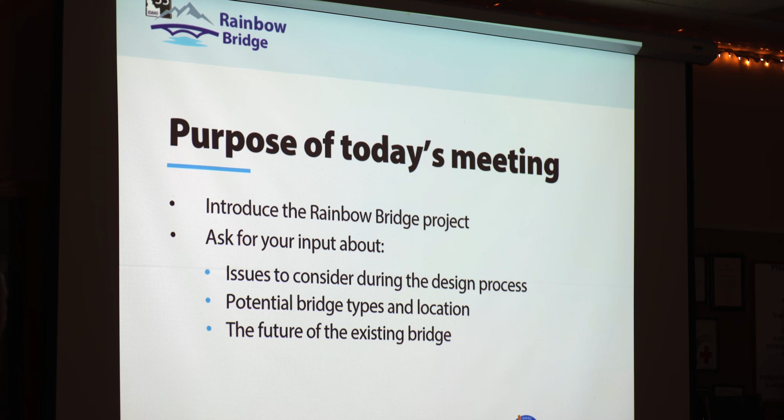Today's meeting, again, is to introduce the project. We're also going to ask for your input. We want to know what issues we should consider as we go through the development and design process on this bridge. What things are important to you? How should we look at this? Are there things that we don't know about in the area or that we need to consider as we design the new bridge? We'll talk about some potential bridge types and the locations of where that bridge might be. And then at the end here today, we'll get into some of what we're thinking with regard to the future of the existing bridge.

Let's talk about the history of this bridge. I mentioned that it's over 90 years old. It's going to be 100 soon. This is a Depression era bridge. So this was built in 1933. The funding for it actually came from the New Deal. This was a major work at the time, and this completed the link for this section of the canyon, which was previously pretty difficult to navigate.

So this was an important link to make it possible to travel between the Boise area and the McCall or Cascade areas. The quotes at the time would kind of astound us in today's terms, right? Down to a 7-hour trip, very reasonable travel time back in the day, but with no particular pressure on the driver.

So I don't know if you've been followed on 55 lately. I feel a lot of pressure if I'm driving anything other than the speed limit.

So why build a new bridge? First of all, old bridges at some point become challenging to maintain, and this bridge is no exception. The aging concrete will start to show its age. You'll get erosion and delamination of the concrete. The rebar that's inside the bridge, in this case some old square bar, will start to get significant corrosion on that bridge, which then contributes to the concrete delamination.

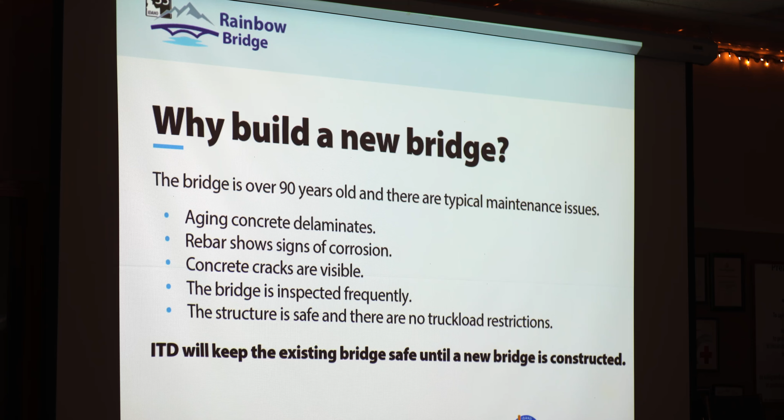So I wanted to emphasize the fact that this bridge is safe today. It's inspected regularly. There are no restrictions on the bridge. So while the bridge itself is not new or modern, the bridge is certainly suitable for traffic today. But we know that won't be the case forever. So we're going to work diligently to keep that bridge safe for as long as it needs to remain in service for traffic. But we know the day is going to come soon when we need a new bridge to carry that traffic.

The other reason for a new bridge really is to get this section of highway and the bridge specifically in line with modern highway standards. The existing bridge is narrow. The existing bridge doesn't have any shoulders. The curves on the end are restrictive. If you've been by this very often, you notice the rails have been hit before with wide loads or errant vehicles. And there are vehicles that are not permitted on the route in part because of this restriction at this exact bridge.

So this bridge is not up to what we would use for the standards of how we would design a bridge today. It's also not feasible to widen or significantly improve those features of the existing bridge. Some bridges, you can add another line of beams, another line of girders, or put a wider deck on. This bridge, that really isn't feasible to do that with. So there's really nothing that can be done to the existing bridge that would make it meet the standards, the widths, and the alignment that's needed today.

We've put some amount of effort into this bridge already. Back in 2021, we initiated what we call a feasibility study. This feasibility study was how ITD went out and solicited some specific information about where could we put a new bridge, what could we do with the existing bridge, could it be widened? We looked at that at the time. And what that study concluded is what we're telling you today about the need to build a new bridge.

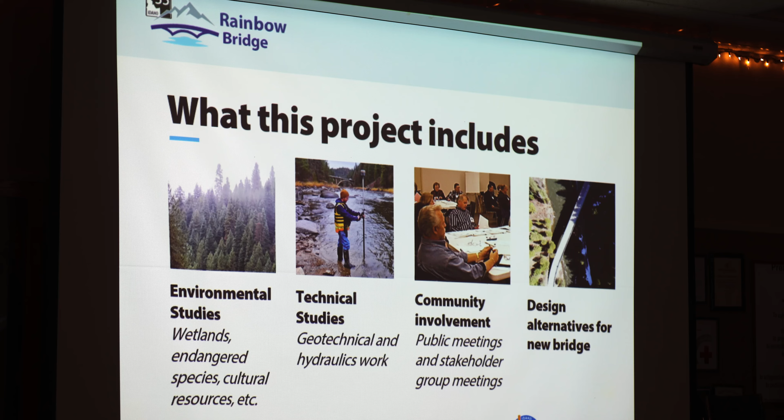Foremost on all these projects, we have to consider the environment. There's a lot of environmental studies that we'll do, and we'll spend quite a bit of time documenting wetlands and endangered species. And this bridge will have cultural resource work owing to the fact that the bridge and the highway itself are historic. There will be a number of technical studies. You see us there surveying the river. We have to make sure that we can accommodate river flows and runoff and drainage, as well as obviously the bridge design, the roadway design, the slopes of the mountain above and below this.

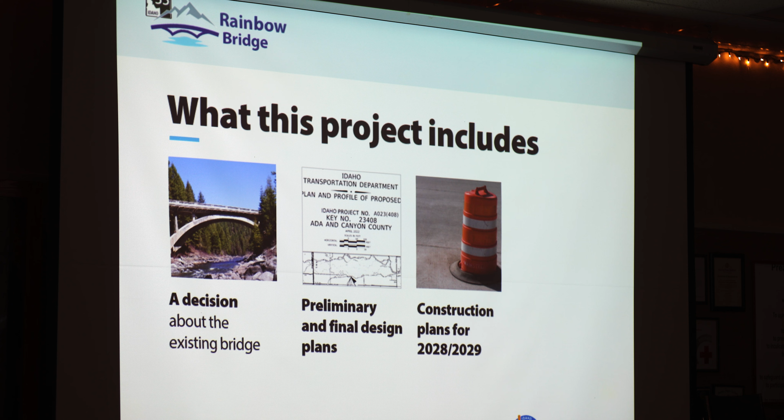We have meetings like these. We get your input, we ask for the community's involvement, and then we'll design the alternatives for a new bridge. We will ultimately also have to make a decision about the old bridge in the course of this project, and we'll generate the entire plan and specification documents that we'll use to ultimately hire a contractor to build the new bridge and put construction plans together that are currently targeted for approximately 2028 or 2029.

That sounds like quite a ways in the future. In bridge years, it goes pretty quick. But we're going to take every advantage we can of trying to accelerate this project to meet or beat that if we can. So that's where it sits in our program right now. We'll see as that grows closer what our actual construction year will end up being.

We know this is a challenging location. If you've traveled the corridor lately, you might see we occasionally have flaggers out there. We're doing some drilling and investigation on this site already, and even that is challenging with steep slopes and narrow access paths.

We have not decided yet what we're going to do with the existing bridge, and we've not decided yet what the new bridge will look like. So this process is going to develop that, and we'll bring you along as we develop those concepts. But we wanted to start early and get your input into those decisions. And so that's really what the group here today is about.

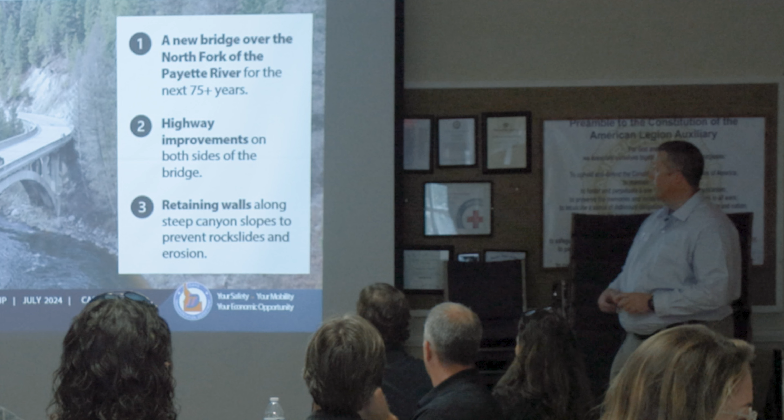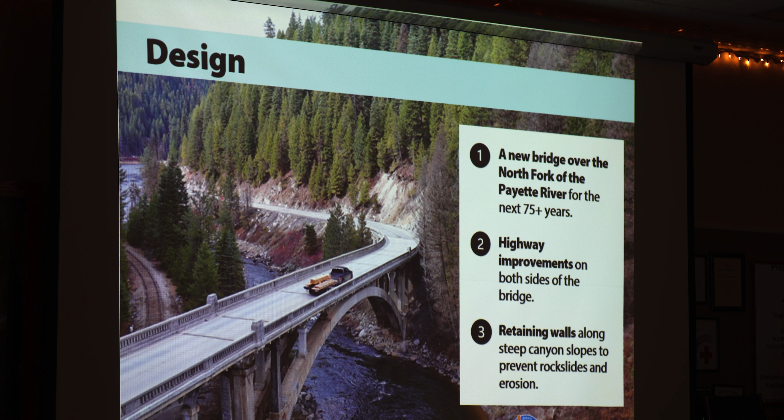We will, through the design, come up with a new bridge that'll serve for at least the next 75 years. Bridges can go longer. The existing bridge went longer, but we'll be designing something for a minimum of the next 75 years. There will be some highway improvements in the area immediately adjacent to the bridge as we affect the curves and the slopes that come in and out of the bridge.

This project isn't set to do the whole canyon, though there will be future work on the canyon itself, but this is going to address enough of the approaches, enough of the roadway on either side to get on and off of the bridge safely. Part of that is going to take some retaining walls. You can see the very steep slope there where the trees are missing. That's just downstream of the bridge.

The new bridge proposal will have to deal with places like that, and so there will be almost certainly some retaining walls and some rock cuts and other things to deal with as we get onto and off of the new bridge. So part of the work of this bridge project will be some of the slope work and retaining walls that get you to the bridge as well.

We will, in the design phase, consider what type of bridges work at this location. There's a lot of types of bridges out there. I'm going to let Dan go into that because Dan does that for a living. I work on highways more broadly, but we'll ask questions of ourselves like whether steel or concrete for the bridge is more appropriate at this location. Which is more constructible, which is more durable, which is more cost effective.

We will do a lot of studying of the rock and the soils, and we'll look at how the rock up here will weather, how these slopes will hold up over time, how we retain the soils with walls or things. We have a railroad crossing at this location as well. Most people don't think much about it, but the railroad that runs along the river here also crosses under this bridge where it leaves the highway alignment. Railroads, even though this one isn't in operation today, have very specific operational widths, heights, and criteria for how we treat the railroad tracks.

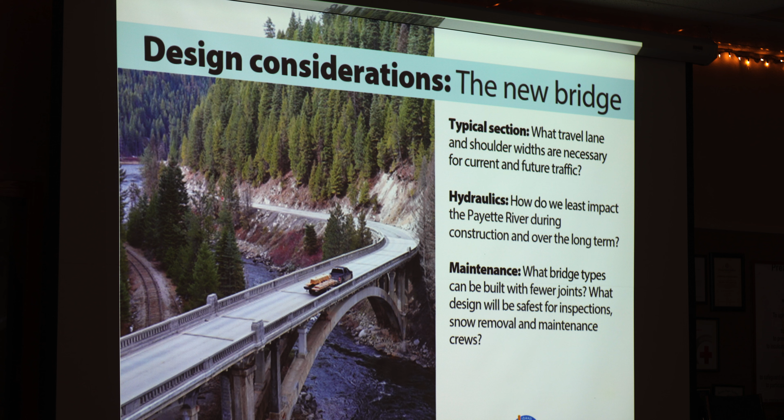We will look at maintainability. So can we build a bridge that is low maintenance and high performance over the long term? And we make sure that there's safe access for the annual or biannual inspections that we have to do. We look all over a bridge at least every 2 years, under it, over it, around it, and we need to be able to do that safely. And obviously in this location, we have to be able to plow the snow.

I mentioned constructability earlier. It is going to be difficult to get some of the large cranes and equipment to this site where they need to be positioned in order to build this new bridge. That kind of has to be taken into account in the design. We need to design the size of the components, the weight of elements and things such that they can be delivered up the highway and then put into place over the river at this site. So that's not something that we take lightly. That'll be part of the design, considering how the bridge would actually be built.

And then of course, we are very interested in what the community input is on this bridge and what features you value and how we can reflect those in the design. The curvature, the narrow approaches to this bridge right now is something that we call alignment. Alignment affects more than just how fast you can go. It also affects how far you can see and ultimately safety.

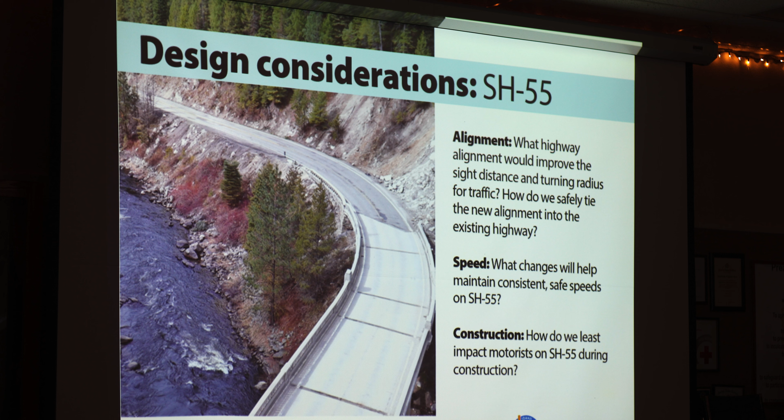So we're very concerned about the alignment of the bridge we build. That'll be a big part of the design. The speed sort of follows from that. We'd rather not have speed restrictions on the corridor. So we'll look closely at what the speed of this section is designed for as you cross a new bridge. You probably slow down a little as you pass the bridge today. Hopefully you won't have to do that at least as much in the future.

And then we also, as well as the constructability, will look at the construction impacts. So how does our construction affect people using the highway? Will there be flaggers or delays? Will we need any closures? How will that affect people that are traveling the road during our actual construction project?

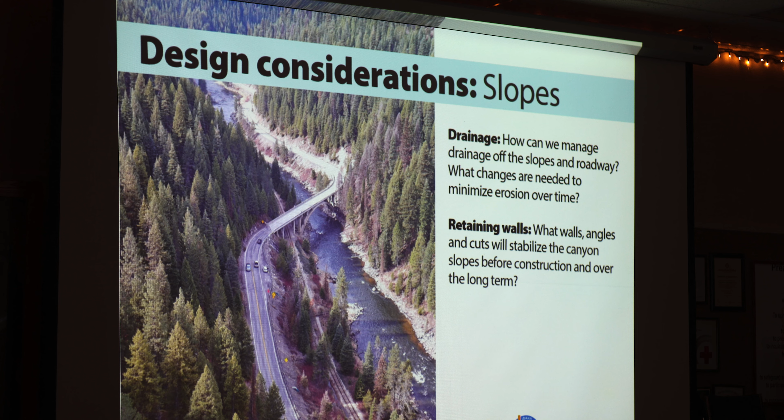We will look at how water from the bridge and from the roadway and from the slopes gets to where it needs to go over time. Make sure that we don't create any erosion or put any sediment in the river. We'll look at how we design those retaining walls, how we finish those walls, so what the face of those looks like, or how they're specifically built, both in terms of their function and their form, so what they look like and how they work.

So I realize that's a lot. I've gone through it pretty fast. But our first question for you, is there anything we haven't thought of? Are there other issues that you'd like us to consider as we embark on this project?

As Jason mentioned, I'm from Modjeski and Masters. We are a bridge-focused engineering firm. I'm the assistant director for our national bridge group, and we focus on unique, complex, long-span bridges. So my career really has been on arch-type bridges, truss bridges, suspension bridges, cable stay bridges, things like that. So this is the kind of stuff we do regularly, and it's actually kind of fun.

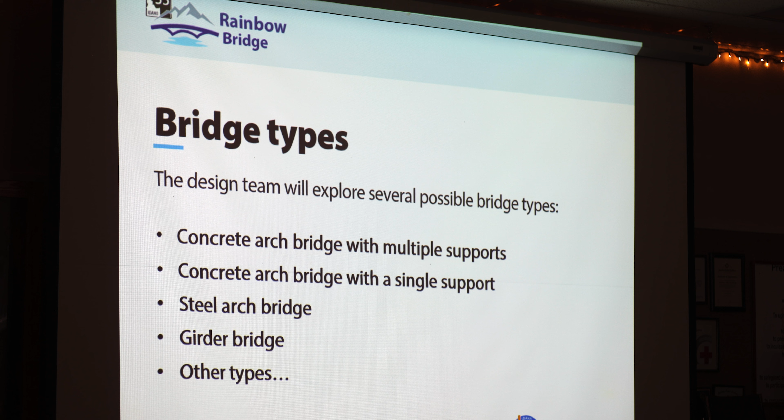As Jason mentioned, not every bridge type makes sense at every location. As I mentioned, I've done a lot of work with truss bridges, suspension bridges, cable stay bridges. Those are a bit too big for this location and unnecessary. They don't quite make sense. Could some of them be done? Maybe, but it doesn't quite make sense. There's a few that do make sense. So we're currently investigating 2 concrete arch options, a steel arch option, as well as a steel girder option. And girder is just an engineering term for a beam.

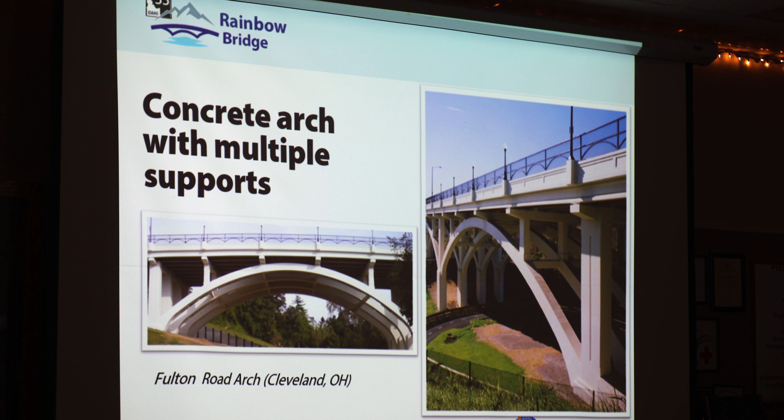The one concrete arch option we're looking at is one that has multiple columns on the arch. It's a very traditional design, very classic, very similar to the existing Rainbow Bridge. Arches do like to be loaded along their entire length. That makes them more efficient. Having multiple columns is an efficient design. This one actually is about the same scale as Rainbow, around 200 feet end to end of the arch span itself.

The existing Rainbow Bridge in 1933 was built cast in place concrete. They actually built the formwork for the bridge in the shape of the bridge and poured the concrete in there at the site. We don't really do that anymore. Nowadays, most things are precast. For example, in the case of this bridge, each half of the arch segment was cast off-site somewhere and then shipped to the site, connected in the field with steel that goes through it, kind of squeeze it together, some concrete closure pours that fill in the gaps. So that is a slight difference.

But what that also means is that you're dealing with heavier pieces. Concrete is heavy. Usually, concrete bridges require bigger equipment because they're just big, heavy pieces that need to be lifted, as well as transported to the site.

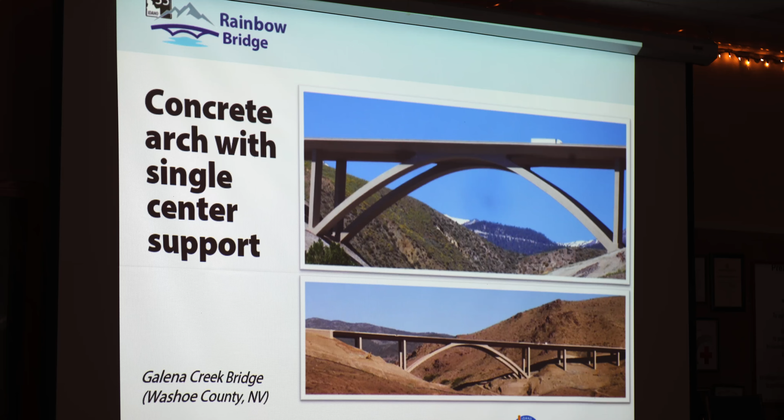Another concrete arch option we're looking at is one that just has essentially a single support in the middle. Here's a couple of examples. This would be different enough from the existing bridge. So it's a little bit more of an open, modern looking feel as opposed to the traditional design. It would be built quite similarly using precast pieces. There's a famous one in Tennessee.

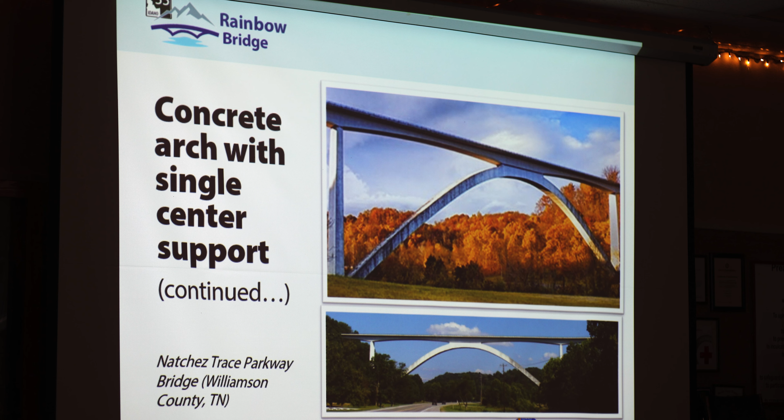These samples are obviously a bit taller and longer than Rainbow, but they have their own aesthetic merits. Even though this is slightly less efficient of a design than being loaded along the entire length of the arch, it's still very reasonable, very feasible.

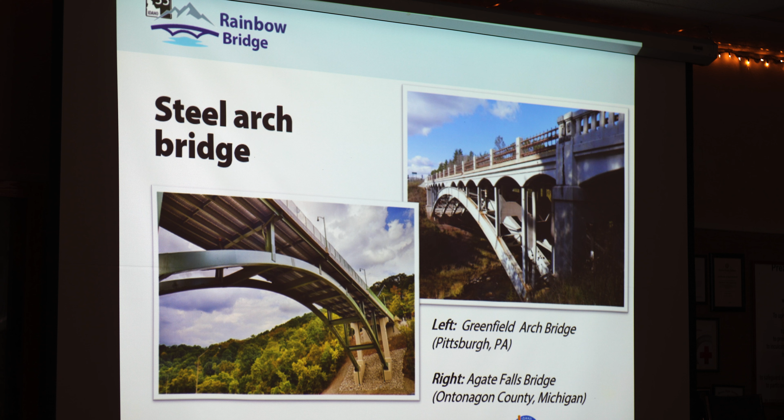We're also looking at steel arch options. Here's a couple of examples. In all of these cases, we would use multiple columns. Some of the benefits of steel is that steel is generally lighter, so you need smaller equipment. It's easier to transport, easier to assemble. Additionally, it's a bit easier to repair. It's a bit easier to bolt things onto steel than it is to repair concrete that's falling apart.

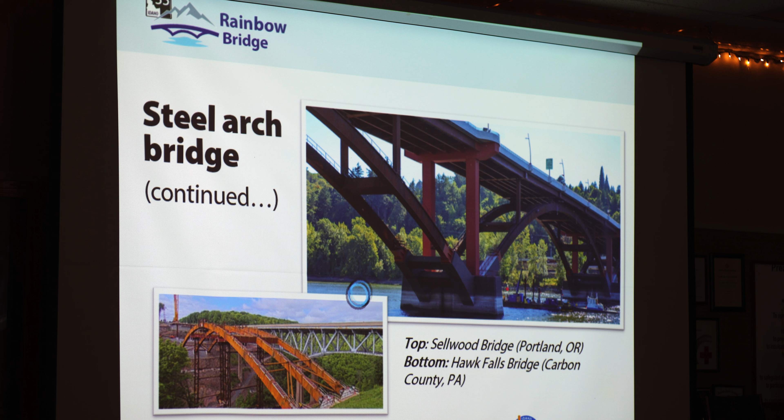That one on the lower left is under construction. That picture is just a couple of weeks old. I was the lead designer on that one. That's an arch bridge in Pennsylvania. So I think we would end up looking quite similar to this one up here, except we would only have one span over the river.

And we're also looking at steel girder bridges. Like I said, girders are beams. This would be more of your standard overpass type bridge that you're familiar with seeing throughout the state. Very simple, very efficient. Some would say not much to look at.

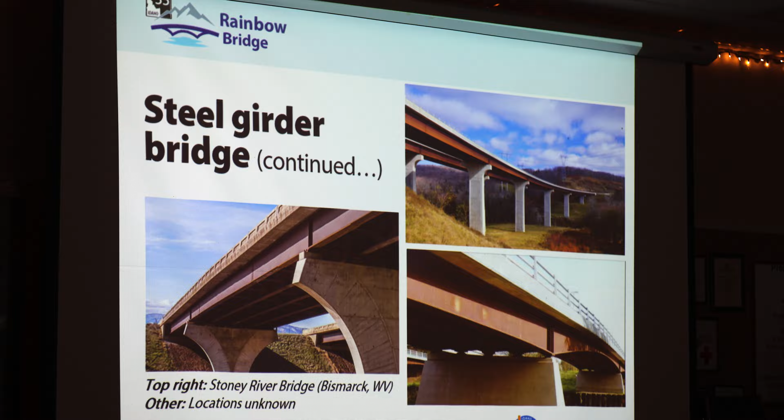You have some opportunities to bring in some aesthetic things, like the piers here have a little bit of a detail there, or this was cut to be a little bit of an arch shape, but it is still a beam, not an arch bridge, even though it looks a little bit like an archy shape. So we are looking at a girder option that would be kind of the simplest baseline you could consider.

We're looking at these different alternatives, and ultimately our goal is to compare them against a bank of criteria: cost, constructability, aesthetics, durability, maintenance, all of those sorts of things. And as part of the process, then we kind of score them and essentially come up with a recommended alternative that gets presented to ITD, and then we go through the process to actually pick one. And that'll be sometime, hopefully later this year, as we start making those recommendations.

Is there anything else that we should be looking at or considering? Any other criteria that we should be comparing the options?

So if you spend any time in engineering school like I did, that part's pretty exciting, right? Figuring out how to design a new bridge, especially what is, by all accounts, a landmark bridge. Believe it or not, I actually participated in contests when I was in college, building scale model bridges and competing them. So it's kind of the fun stuff for engineers to consider.

We'll have a lot more to talk about the new bridge. If you remember, the next meeting is all about features of the new bridge. So a little teaser for that. Please come back. We want your continued input into the design options we come up with. Dan, I think, has a lot of great ideas on how we can go with this, and we're eager to show you what we'll come up with there and get your continued input on that.

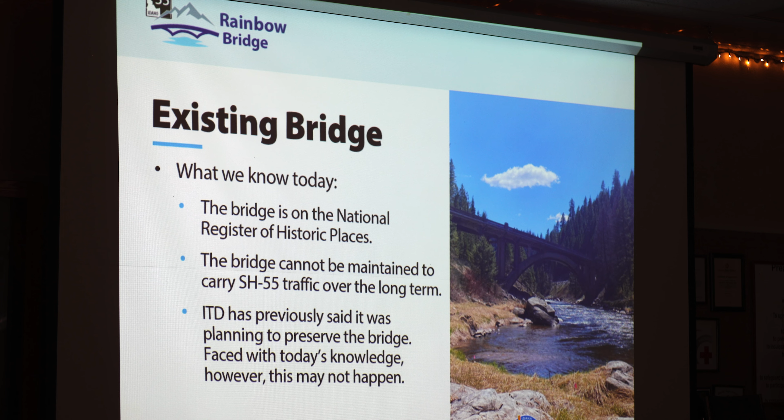So we're going to do a lot more work on that as we move forward to figure out, can we or can't we? What does that maybe look like? We know we have to keep this bridge functional until that new one is done, and we will do so.

There are minor issues on the bridge today that are going to take some short-term fixes. So we are planning on a project next summer to do some repairs on this existing bridge. Those are necessary to keep the existing bridge in the condition that it can be open and unrestricted for traffic.

So I definitely want to emphasize again, this bridge is completely safe today, but we have to design for the next earthquake, the next 1,000 trucks, the next 10 years of keeping this bridge safe while we build a new one. So there'll be that repair project next year to keep it in that case.

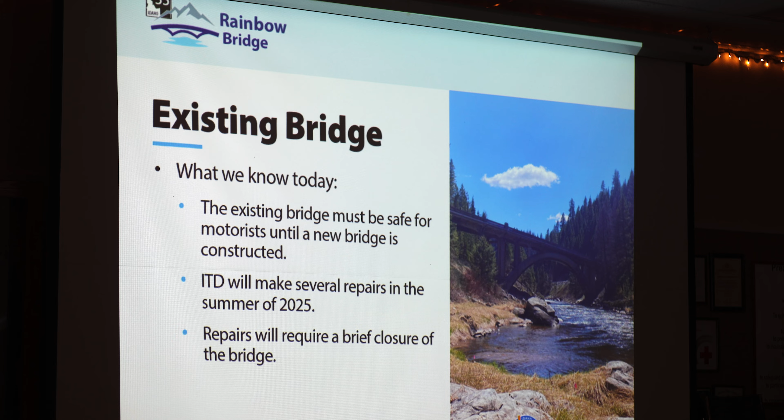There will be some short interruptions and closures while we're doing that, and we'll have more information out on that as we develop those. So there might be some times when there's a flagger and a short delay at a flagger station, or we might have some longer closures, say middle of the day, like we did when we were doing the Smiths Ferry project. So we'll figure out, based on exactly what those repairs are going to take, what that'll look like.

It's hard to get underneath the existing bridge. There's not a lot of access, and so we kind of have to do that off of the bridge which is disruptive. So we'll keep that minimized, but just wanted to give a heads up that we are going to be working on the bridge in the meantime.

We still need to know your thoughts and the community at large's thoughts on the existing bridge. Part of the reason for this outreach is to get your thoughts on the new bridge. Part of the reason is to get your thoughts on the existing bridge. So if you have a strong opinion about what we do with this existing bridge, that's something that we want to hear. We will be looking at what options are feasible.

So if we're to keep this bridge, we need to evaluate what we need to do to it so that it stays in an acceptable condition. So we'll be looking at what we would have to do to the bridge in order to keep it. It's kind of like keeping paint or roof on your house, right? How many times am I going to have to do that? Or do I need to replace the siding?

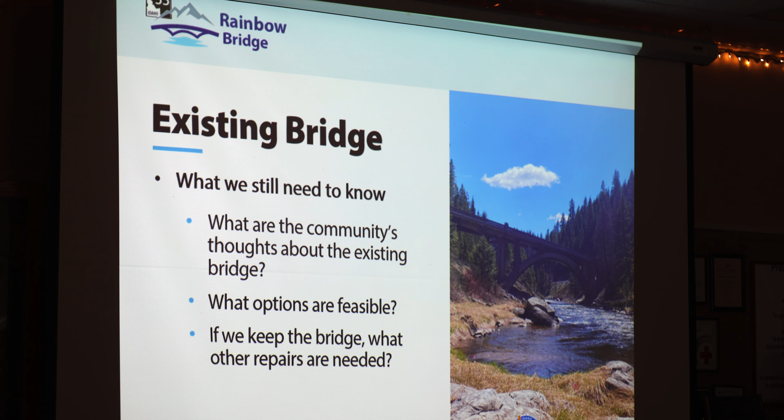We need to look at the elements of this bridge and say, do I need to replace some concrete? Do I need to shore anything up? Or what would I need to do to keep this bridge long term? And then, besides what we're doing next summer, what other repairs would we need to schedule and do to keep it? That's going to lead me to this question, and I realize I haven't given you a lot of information to go on, but based on what you know today, what are your thoughts about the existing bridge? What would you like us to consider as we're figuring out what to do with that existing structure?

I mentioned public meetings next week. On Tuesday, we will be at the Evergreen Hotel in McCall. Please feel free to join us again there. We hope to get a bunch of the public as well. We will be there from 4 to 7 p.m., so drop in anytime. We will be in Horseshoe Bend on Thursday, July 25th, also 4 to 7 p.m. at the school. So whichever one's convenient, or come to both, by all means. If you have a smartphone and you want to hit that QR code, the invite's in there as well, and then you'll have the information on your phone.

Next steps, we're doing these series of meetings. We already did that feasibility study. We've initiated the project, so we're here on the community engagement in July. We are starting on technical and environmental work, so that's getting rolling as we speak. We're out there doing the geotechnical investigation.

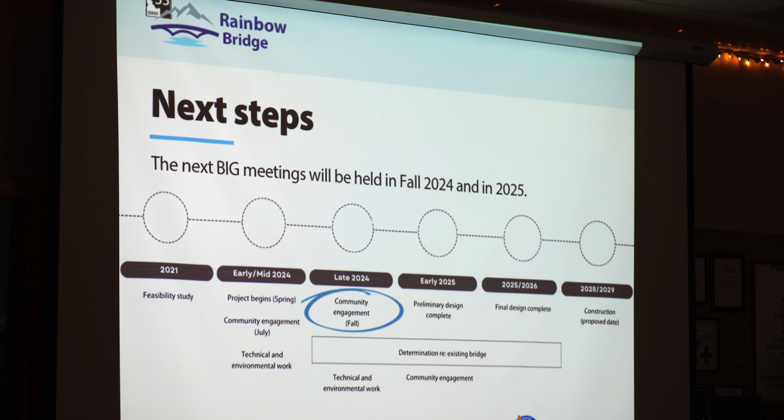We'll be back next for this fall community engagement, and the determination of what to do with the existing bridge as well as the new design are going to come together roughly contemporaneously over the rest of this year and into 2025, maybe 2026. So over about the next year and a half, say, is really the process and the time frame where we're going to go through developing all the details of what the new bridge looks like, and we'll work through all of the process on what becomes of the existing bridge. And then, as I mentioned before, construction is currently scheduled for the 2028-2029 timeframe.